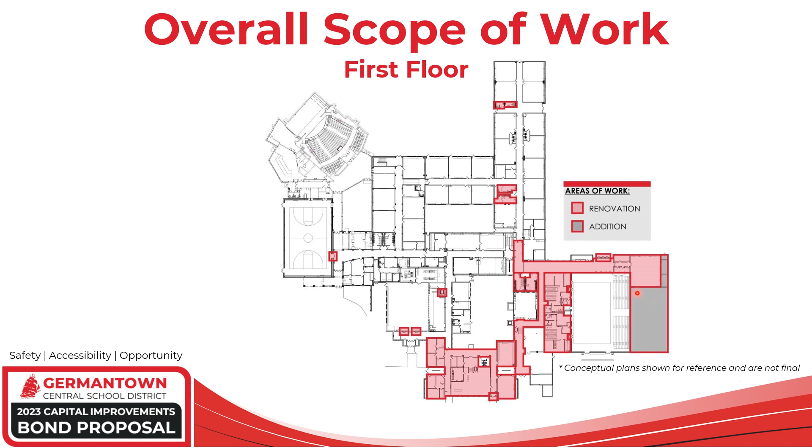So overall, our scope of work, this is the first floor. Everywhere in red, you'll see these are renovations, the different spots throughout the building that are going to get renovated. Our gray area is the addition, which would be the addition of a maintenance facility for the district.

Looking at the second floor and the roof, this is the different areas of scope. Again, in red are the areas of renovation, and the gray will be the addition.

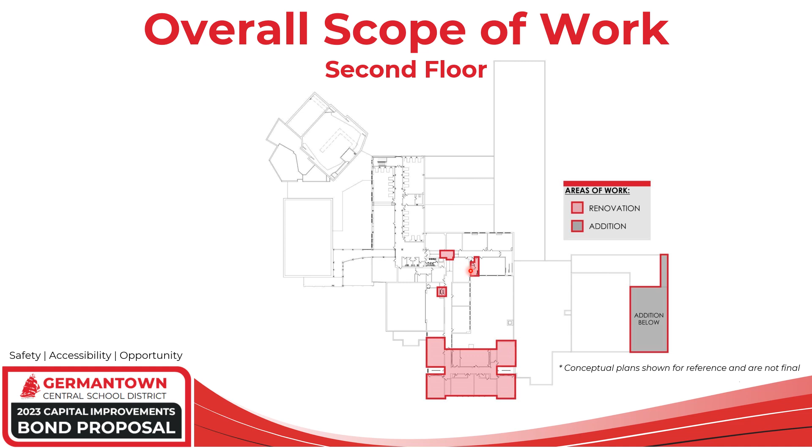So we're going to go through the scope in each one. We're looking at addressing flooding in the basement. Our current basement has flooding downstairs due to the water table that's been here since the school was put in its place. You'll see the reflection in this first picture, the glistening of the water off the floor, showing that there is actually water down there.

At times after major rainstorms we get water, and when we remove a pallet, because we have to keep everything on pallets in the basement, sometimes there's mold underneath that we have to clean up and get out of there. For our gentlemen to even get down into the basement, they have to use this little wooden ramp because water builds up at the bottom of the stairs during heavy rain, so they'll walk across that ramp to get through without having to step in the water.

These are unsafe environments for our staff to be working in. We all know that water creates moisture, and moisture can create mold, and mold will develop sicknesses and illnesses in our staff. We don't need that or want that.

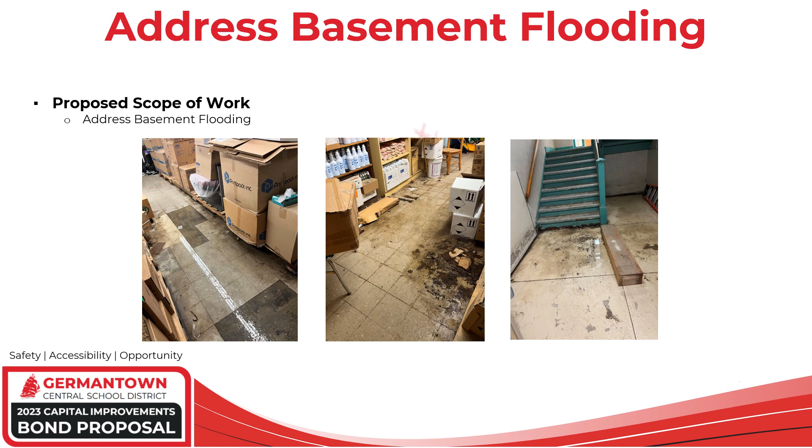Our playground renovation - we're looking to demo the existing playground over on the Main Street side of the building. This playground is used for 2nd to 6th grade students, and we're going to look to install a brand new playground with a poured-in-place safety surface.

Currently, our playground is wearing down on the rubber protection on the steps, causing the metal to rust because it's exposed to the elements. Several of the equipment outside do not work as they're not functioning and don't slide as well anymore. The ground is gravel, so it's not a soft padding - it is bare down to bare dirt in some spots, making a very hard impact.

In fact, in 2021-2022, we had 141 injuries on this playground. In the 22-23 school year, we had 149. And when we started this presentation about a month ago, we had about 35 injuries so far this school year.

One of the other benefits with replacing this playground is the company we're looking to go through allows us to have a 25-year warranty no matter what. So if a part breaks or falls apart, we call them up and they come out - no cost for labor, no cost for supplies or materials - and they replace the part immediately.

The other benefit is we can also look at doing a community project with the community in developing this playground to where it cuts down cost on labor. We just have people come in, help do the work, and they actually bring a foreman on site to ensure everything's done to code, and it still keeps that warranty for the 25 years.

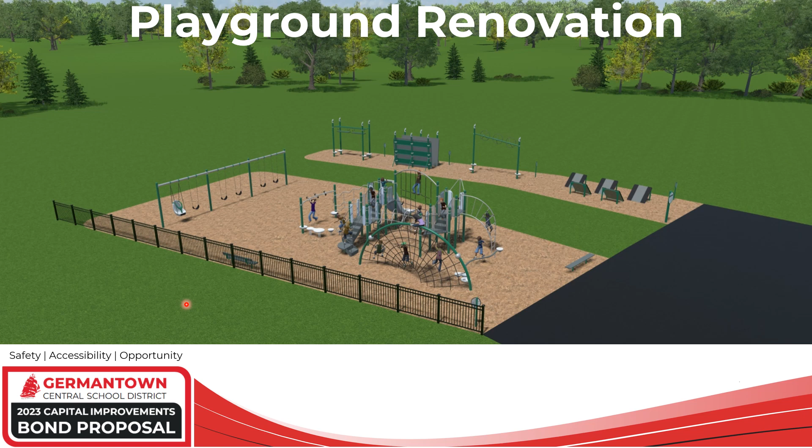This is a rendering of a drawing that our architects have done for another school at the same company. This is at Webutuck, so this is a concept design. This isn't exactly what we're going to do, but this is similar - it's similar to our size of playground. Currently our elementary principal and our CSE director are working with the architect and the company to pick out what equipment we'd want and how we'd want everything to lay out.

Looking at some site work for the district. We're installing new outside speakers for emergency purposes, so if we have to have a lockdown or a lockdown drill, those that are out in the fields and behind the school can hear that emergency announcement.

We're repaving the north parking lot, that's the front parking lot on the Main Street side of the building. We're also going to be installing a sewer line going from the district down to the Bank of Greene County where the town has a sewer already run, and we're going to connect right to that. It's gravity fed, so we don't have to use pumps or anything.

We're also installing a fire apparatus access path to the fields, so that way emergency vehicles can get out to the fields in case of an emergency and won't have to worry about trying to truck through the mud. It gets very wet over here on this side of the hill. And we're replacing cafeteria steps in front of the building as they're deteriorating and falling apart.

We're also looking at installing a path around the brand new auditorium for emergency purposes as well. If we were to have a snowstorm or a rainy day and had to have an emergency and evacuate, trying to get somebody in a wheelchair through that area would be very difficult.

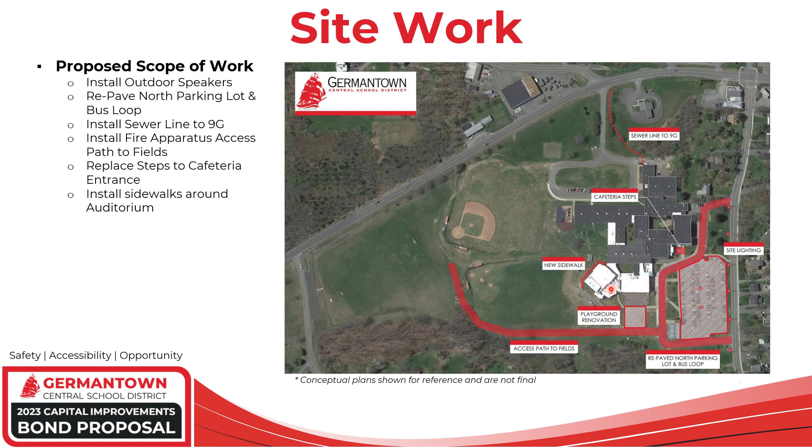Looking at our roofs, mainly the original roof and the second addition to the building, we have a lot of leaks and holes. As you can see in this top picture, there's so much moisture in the insulation from the hole, we even have a plant growing. So what we're going to do is cut out 10 by 10 patches, pull out all the wet insulation, then re-insulate, reseal that patch, and recoat the entire roof.

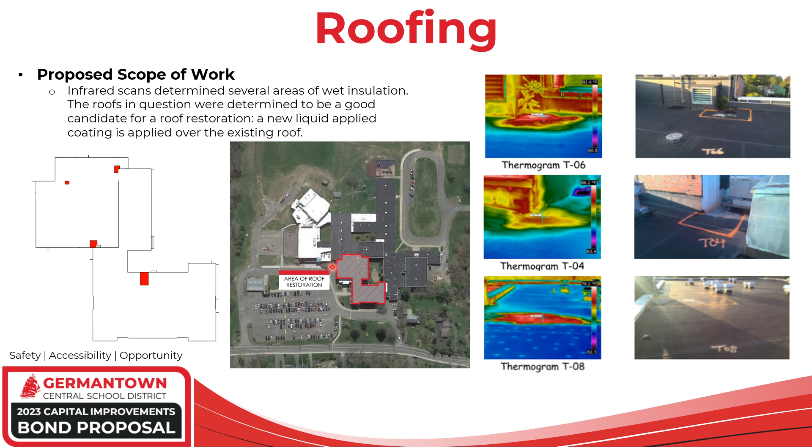We'll also get rid of this black roofing in this area and turn to a white reflective roof. This allows for less AC usage in the summer because the roof isn't absorbing all that sun ray, which can, in the end, allow for a reduced cost for the district.

Locker room renovations: these locker rooms are from the 1960s, so they're very outdated. They have very tall lockers that don't allow coaches or physical education teachers to watch the students and ensure they're safe and not horseplaying. Several of the equipment and benches have broken down and are breaking. Our heating system is on its last leg and about to go out. Most importantly, we still have asbestos floor tile in the girls' locker rooms.

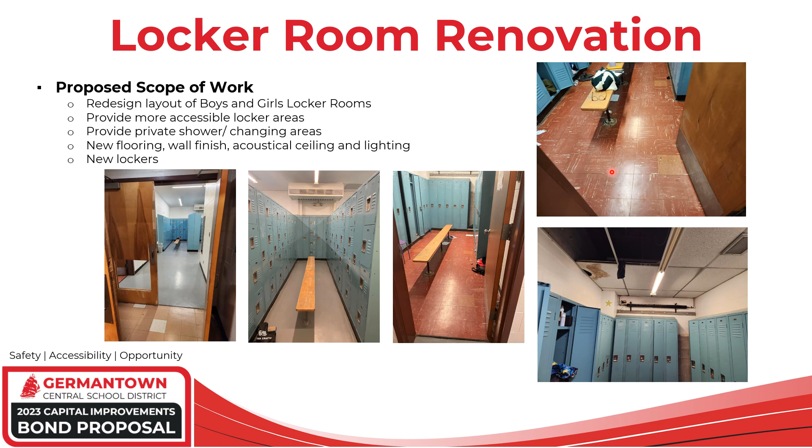Another issue is the girls' and boys' locker rooms are not similar. There are differences, which is a Title IX violation for the district. So we need to get this addressed to make sure we aren't in Title IX violation.

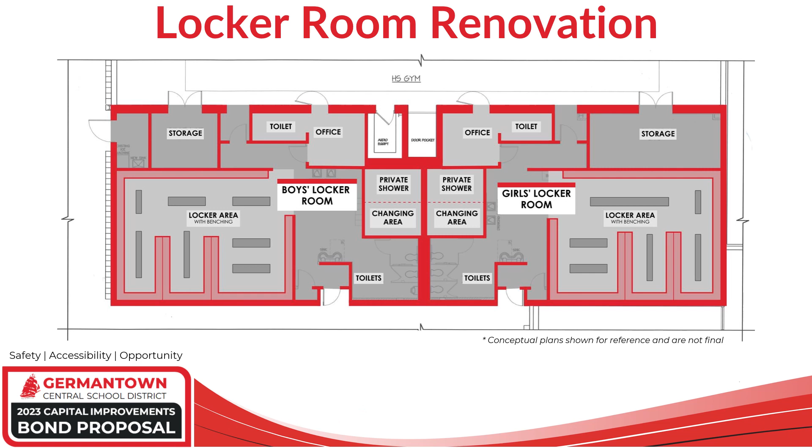Bathroom renovations: several areas throughout the building, including the second and third grade bathrooms, our red tile area which is the pre-K and kindergarten bathrooms, and the boys' bathroom on the second floor, are all a little outdated to the point where there are still touch systems where you have to touch a toilet, urinal, or sink to use them. We want to get to a completely touchless bathroom, where you just use the facilities, wash your hands, and get out. We also want to update them, making them look cleaner and nicer so people want to use those restrooms instead of avoiding them.

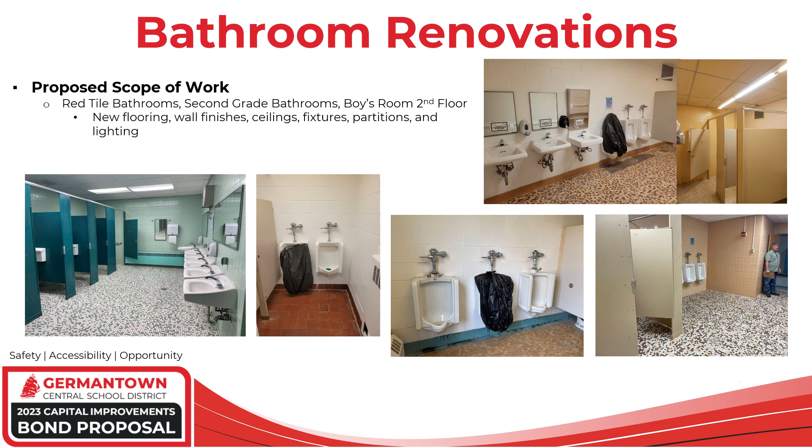We're looking at converting chairlifts to ramps throughout the building. We have 4 chairlifts and we're looking to convert 3 of those to ramps. Often these chairlifts have so many safety mechanisms that if they go down, it costs anywhere from $500 to $5,000 to repair, just for 1, 2, or 3 uses. So we're looking to convert these to ramps instead. Unfortunately, with a ramp, for every inch high you have to go a foot out, so one of our areas is 64 inches tall, meaning we'd need a ramp covering 64 feet, which would be very costly.

We'd have to move several classroom doors and locker room doors, and we'd lose out on several student lockers doing that conversion. So the cost wasn't worth the benefit.

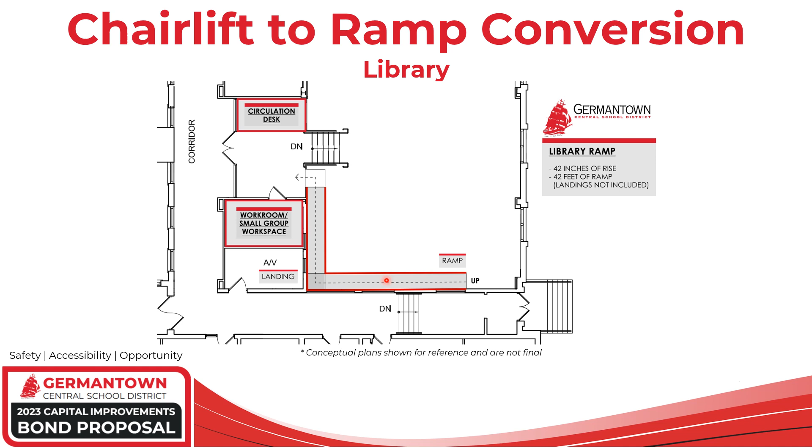Lockdown door hardware. Currently we have several keys throughout this building because there's so many additions, and a lot of the keys aren't in sync, so I want to say I have about 8 keys in my pocket right now for this district. This would allow us to convert to 1 key for classrooms, 1 key for admin offices, and 1 key for exterior doors. That way in the classroom, a teacher, student, or another staff member can lock a door in an emergency without having to have the teacher there or fumble with keys. It's a quick push of the button, the door is locked, and they're safe and secure.

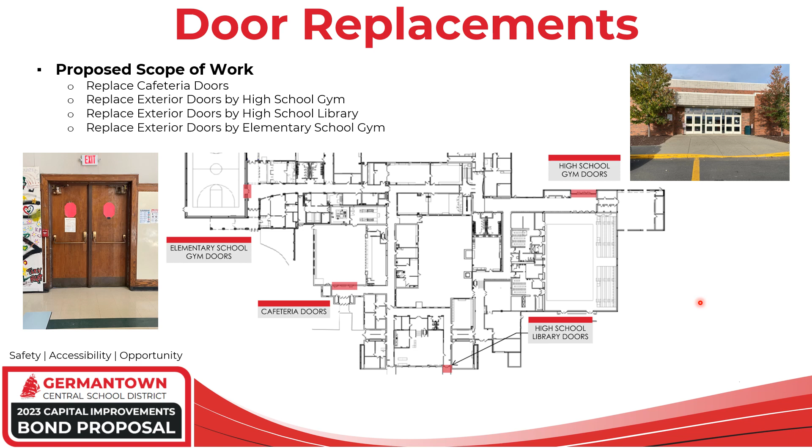We're going to be removing all the original carpet and replacing it with LVT tile. For those of you that have walked through the original part of the building, you know that the floor creaks. Because the floor is not level, we'll also be improving the rafters or the supports underneath the floor so we can eliminate that noise and reduce any noise in the classrooms that students might be hearing when other kids are walking down the hallways.

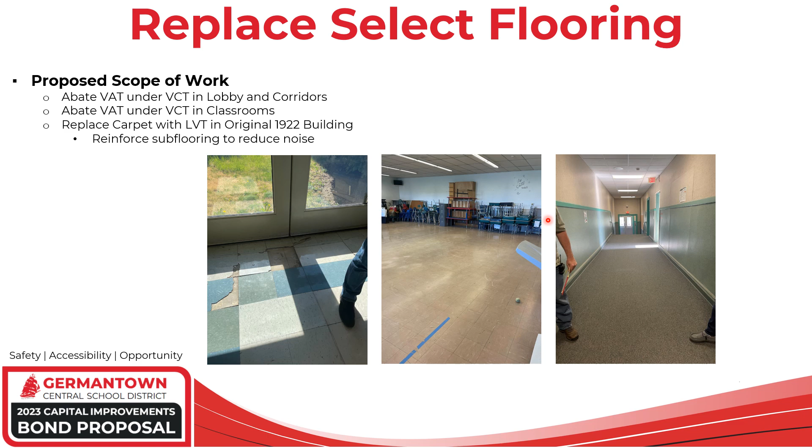Additional interior work: we're replacing our oil line in the basement to allow for more oil flow to our boilers so we can utilize all of our boilers. We're also going to be increasing the pumps to our boilers.

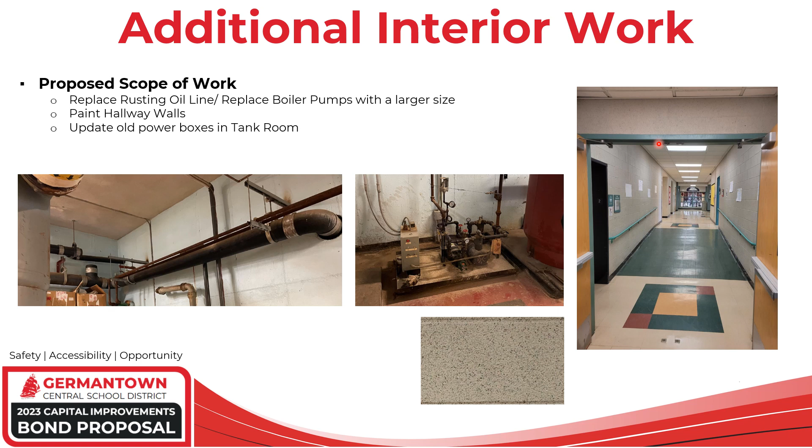Also in our tank room downstairs in the basement, we have a lot of old fuse boxes. These are not just regular breaker boxes - some of these are old fuse boxes. These need to be replaced and converted to actual breaker boxes, or if they're completely offline, just removed from the wall entirely.

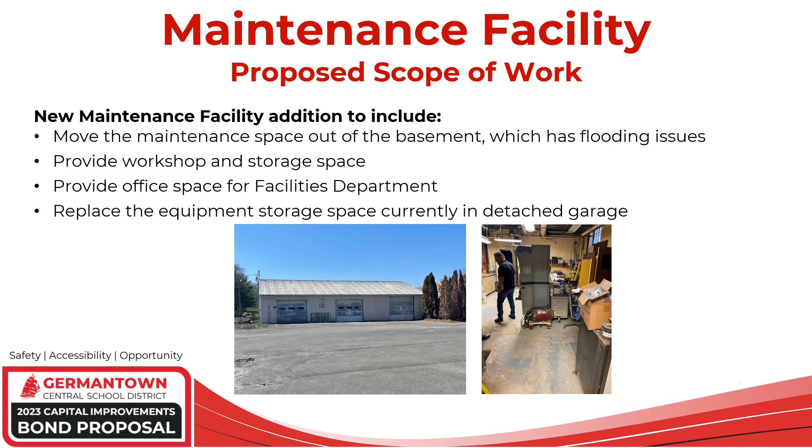Maintenance facility. Looking at the main issue of getting the gentleman out of the basement to get away from the flooding area, we worked with 4 different concept designs on what we could do, and we settled pretty much on this design here, which is removing the old garage that's in front of this school, which is really an eyesore for the district, completely removing that, allowing for more parking space up front. Then in the back of the building, on the back side of the high school gym, we would be able to build a maintenance facility for the team.

This would allow for a loading dock. Currently we do not have this, so if we were to ever get a truck come to the school that doesn't have a lift gate, we really can't accept that delivery. This would allow for that, so we'd actually have a loading dock pad, so either there's a lift gate or not, we're able to get the supplies off of that truck.

This also allows for a 3-bay garage that allows the men to have a spot to work on the vehicles and maintain them. Currently right now in the garage out in the front parking lot, there's no heat in there, it's not insulated, and the walls are starting to deteriorate on ground level, so the water's rushing right in when it rains. So if they have to get on the ground to work on a truck, they're laying in cold, wet concrete.

This also allows for storage area for supplies, to get all those supplies out of the basement where it's wet and moist, getting them up here in a dry environment so they don't get ruined.

With this, we're also going to be able to convert our old music room into an actual fitness room. Once we get rid of those asbestos floor tiles and put in floor padding and get equipment in here, we have a college level fitness class that we run here at Germantown.

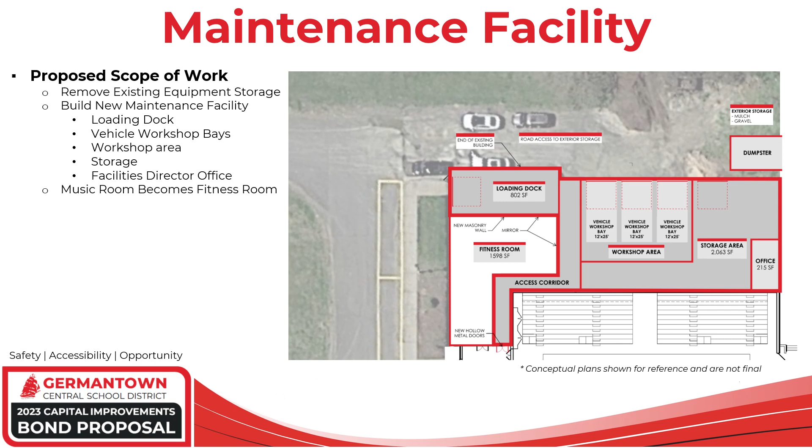And last, we're looking at a generator. On our second day of school here in 2023, we had a power outage in Germantown that everybody knows about, and unfortunately we had to close the school down. We didn't have the ability to keep the building open. And then we also found out on that day that we are a Red Cross shelter, which let us know that we can't support the community if there was a need.

So to be able to support the community in case of a power outage or a disaster, we're going to need some way to keep our kitchen up and running, keep a spot for people to hang out, and keep our bathrooms up and running so people can use facilities and take showers if needed. So this is going to be crucial.

We're also looking on the back end of working with the FEMA group, Red Cross, and Columbia County Disaster Recovery to get this done through a grant. So if we're able to do that, then we don't have to put this through to the taxpayers and we can just expense this elsewhere.

So how are we going to do this project? We're looking at doing this phased out over 3 years. Phase 1, work's going to begin winter of 2024 and complete fall of 2025. Phase 2, work is going to begin summer of 2025 and complete in the fall/winter of 2026. So looking at each phase, we're going to have scope 1 and scope 2.

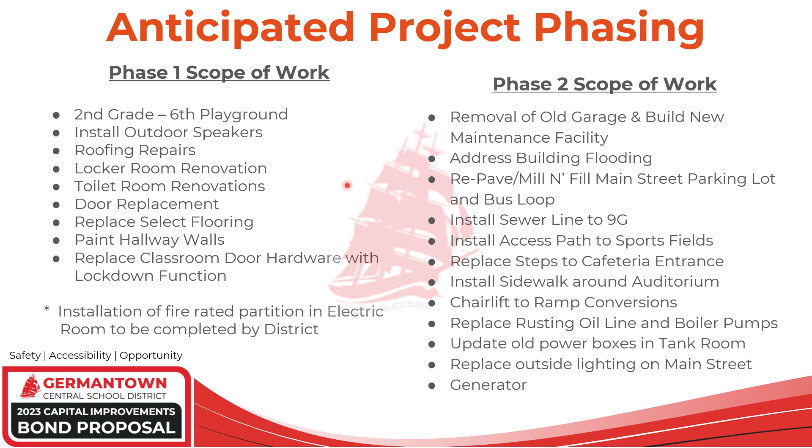Scope 1 is looking at items that are much quicker to submit to SED. They're very straightforward for the most part. Phase 2 is a little bit more detailed, a little bit more drawings and concepts are going to be involved, and it's going to take a little more design time. So putting that in phase 2 gives us that time to address all the needs in those projects.

But once the vote is passed, we will start the design phase. We'll be working with our architects and engineers and project manager to really get every design and concept down that we want for these areas. Once design phase is done, we submit our project to SED for review.

SED is about a 12 to 16 week lead right now. But that doesn't mean just because we submit to SED, we've got 12 to 16 weeks to just hang out and sit on our hands. We're immediately starting the design for phase 2 once we submit to SED and we're waiting for responses.

Once SED does respond, we'll be able to get our bids and awards put out for the projects. This will give us our actual true costs for the capital project.

At this point, we've talked with the board due to the situations that happened at the last capital project and skyrocketing prices. This is when the board can decide, do we save the money and pull the plug because costs are way too high, or do we keep moving forward? And if the costs are much higher than what the taxpayers have approved and things would have to get pulled, we would come back to the taxpayers and have that conversation and figure out what we're going to pull. We will not just be pulling items and doing certain projects. So at that point is when the board can choose to pull the plug.